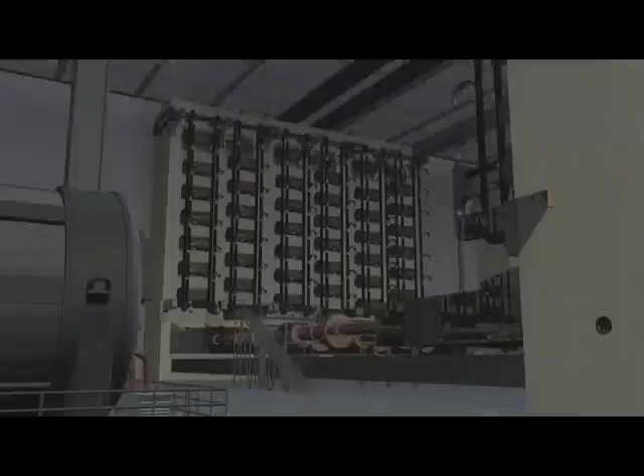Is there really no solution to the global energy problem? A decentralized power generation system which can be used anywhere it is required and is available day and night. A completely new type of power station with constant, non-hazardous and never-dwindling power, independent of sun, wind and water power.

My interest to do these research activities is that the machine is very interesting. Everyone knows the enormous forces which a body's buoyancy creates in a liquid. It's the so-called Archimedes principle. Here we're talking about a force opposing gravitational force which never dwindles.

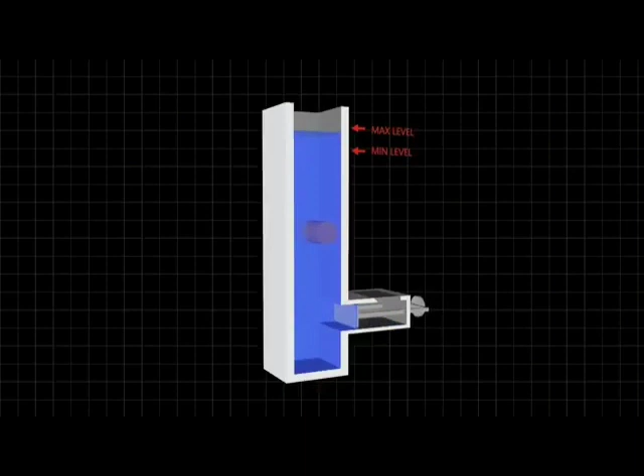To immerse a body in a column of water, one has to raise the entire volume of water above the body and also overcome frictional forces. We have solved this problem by connecting two towers together. This is a principle which has been known for centuries as communicating tubes.

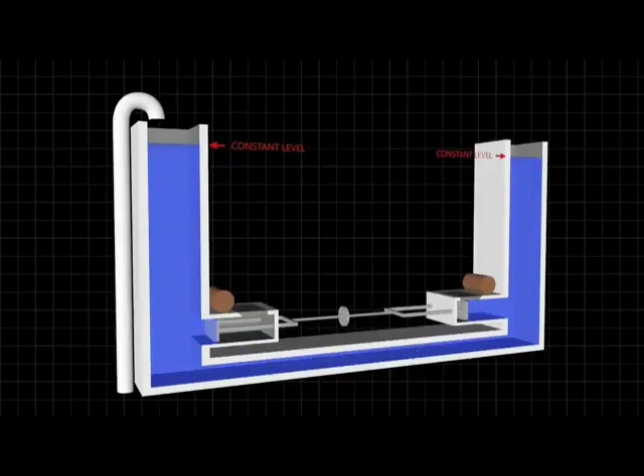The force of both pistons is now equalized. The column of water no longer needs to be raised. We have created a cavity behind the piston into which the working element can now easily be inserted.

So we did some calculations of the efficiency of two different parts. We did a calculation of the hydraulic drive. There we got an efficiency of about 60 to 70%. And we calculated the efficiency of the mechanical part of the tower. And there we got an efficiency of about 90 to 97%.

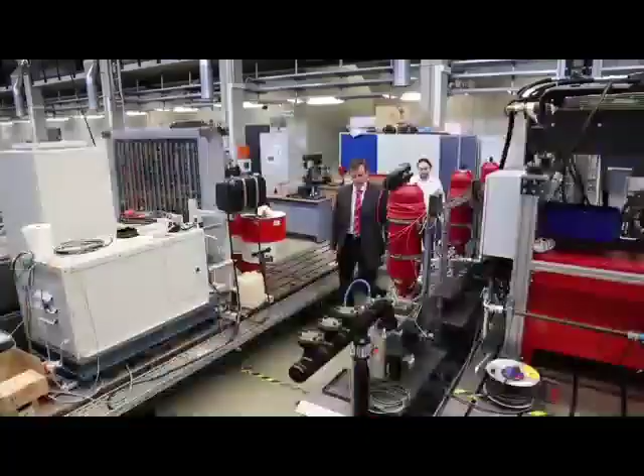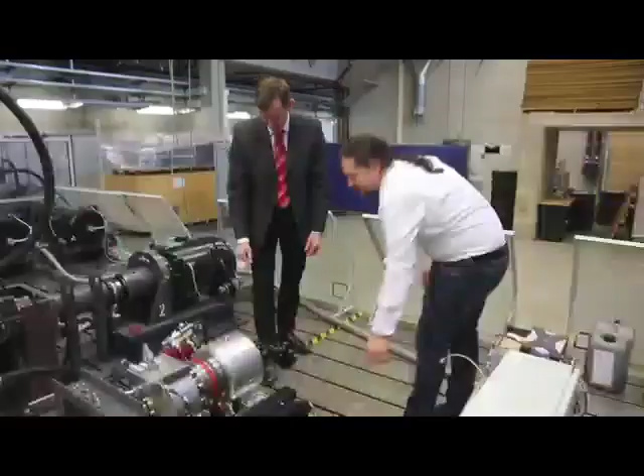We expect that the efficiency is in a typical range, so no extremes in positive and negative ways. So we think that the efficiency is good in comparison to other machines, because the machine is just operating in one specific point. The principle used makes it obvious that the power provided by the unit is mostly dependent on the height of the water column and therefore on the structural height of the water towers.

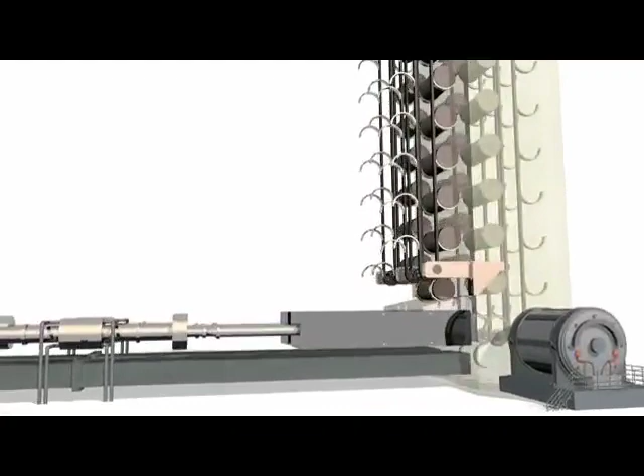In order to counteract this dependency, several lower columns of water can be built into a tower adjacent to each other and connected to one another if required. We think they are just state-of-the-art, so pressures are low. We do not expect anything worse in the cylinders. The mechanical parts are state-of-the-art, so we do not see up to now any problems in this mechanical part.

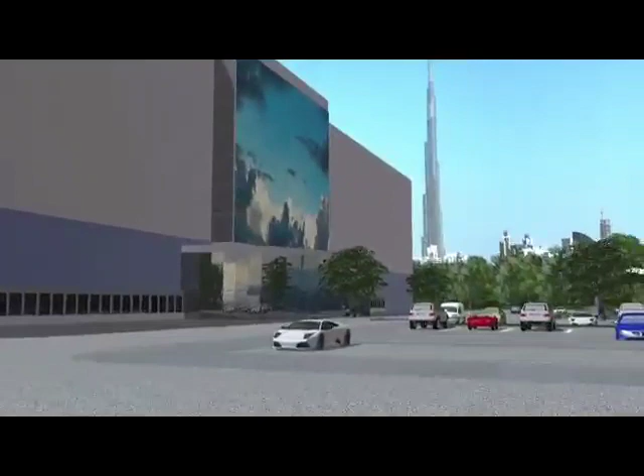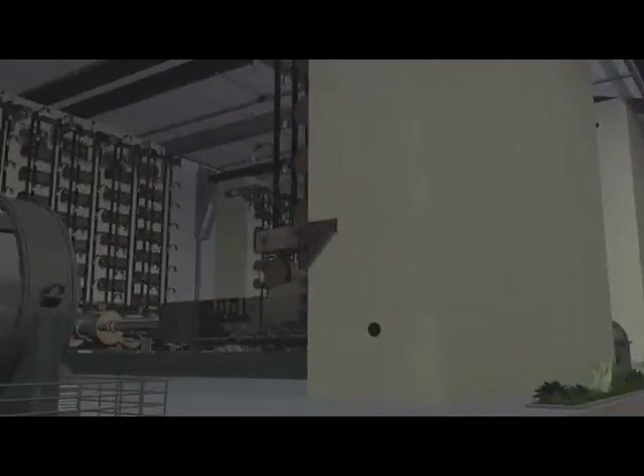The energy towers can be dimensioned and scaled as required, depending on the energy and space requirements. They allow an extremely high system stability with an average operating time of over 8,000 hours per year.

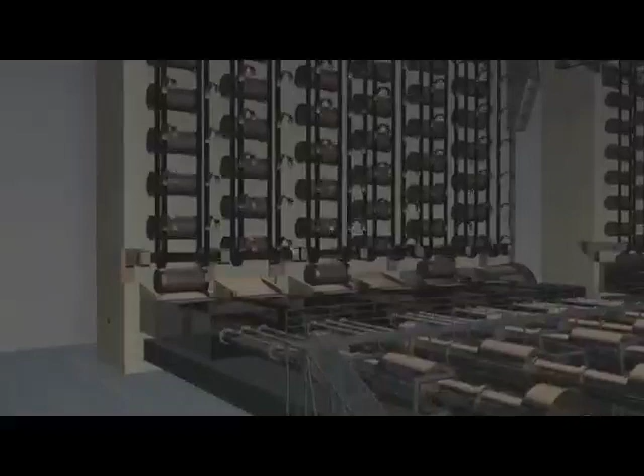Usually we are working in the field of mobile machines, so we are looking at machines from about 1 to 2 tons up to 40 tons. So this is the range we are calculating with. Taking these big machines into account, we have pressures in the cylinders of about 300 bar. The pressure here is much less, about 30 to 40, 50 bar. So we do not expect any problems.

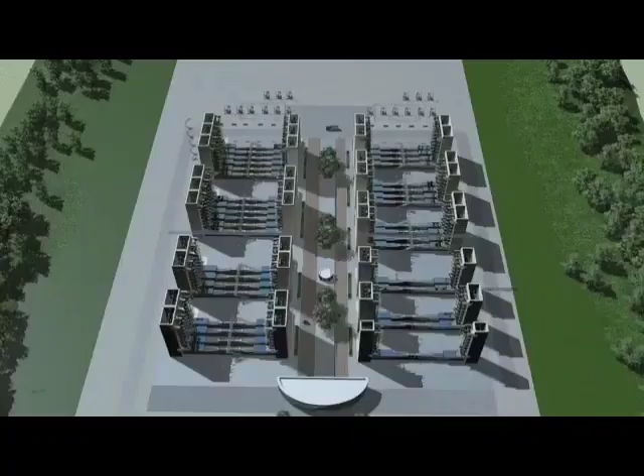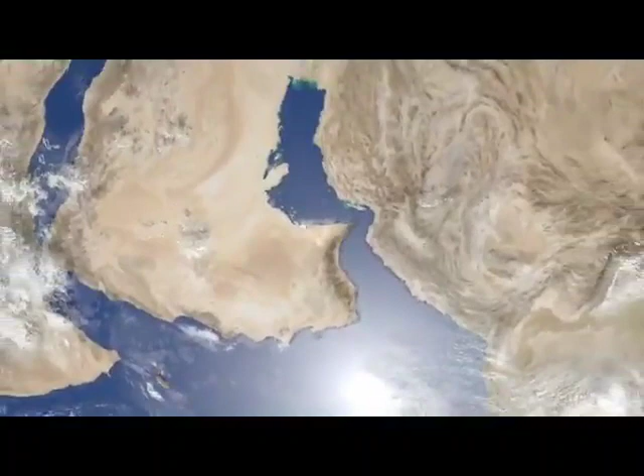Energy towers, a highly economic and reliable power generation system which protects our resources, environmentally friendly and independent of tides and location.